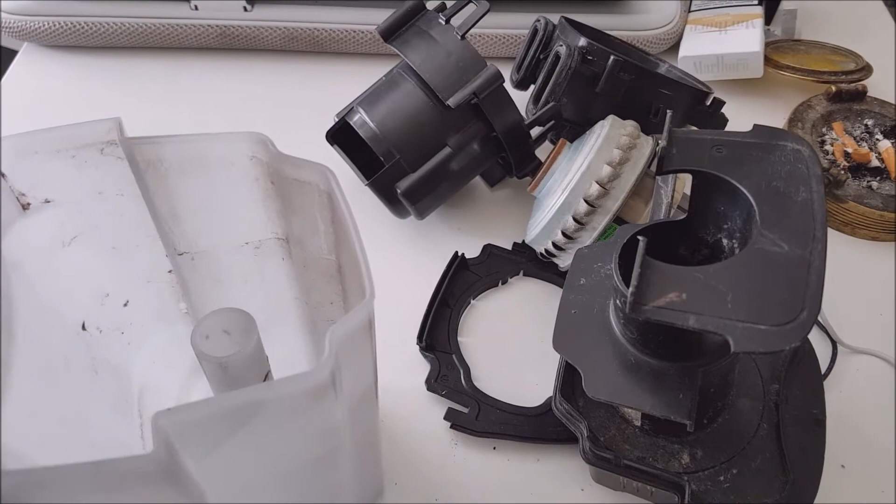Yes, Kärcher cares. And the story that goes on from the point when I published my videos is a rather amazing one. I got several mails from Kärcher, and one of them was not exactly constructive, but the other ones were. So it happens that instead of sending me their lawyers and/or public relations assistants with big chests, they sent me something completely different. A ball game I was not expected to handle.

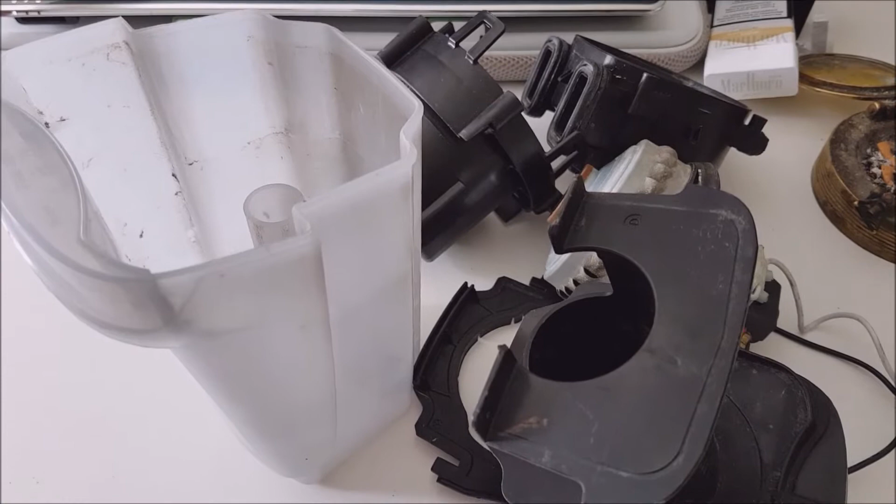Really. They sent me a full-blown competent development engineer. Yes, they did. So, yep, I'll say it once again. Kärcher did send me a full-blown competent development engineer. Now, how cool is that? All of it because my unit got somehow destroyed by premature corrosion.

Wow. Yeah, so with the gentleman we sat down at a coffee table and we discussed several issues. We discussed definitely engineering, and also I displayed the parts I recovered from the old units, and he took them away for further analysis. Now, that's something that they haven't seen yet to that extent, but definitely there's going to be feedback, and production methods would probably be altered to incorporate grease, or I don't know, whatever solution they'll come by, because it's really a big piece of very nice engineering.

So, injecting oil in the crankcase was an easy fix. Yes, but easy fixes apply to products that can stand them. Mostly good products, because you cannot really apply an easy fix to a lemon and expect it to become a good product. It will take much more than that.

So, also in the comment section, I received a very interesting input from a viewer who claims that overloading the accumulated water tank could lead to problems. And I decided to take apart the heart of the machine, actually the blower or the sucker, well, the fan, the turbine. And this is what happens in the process.

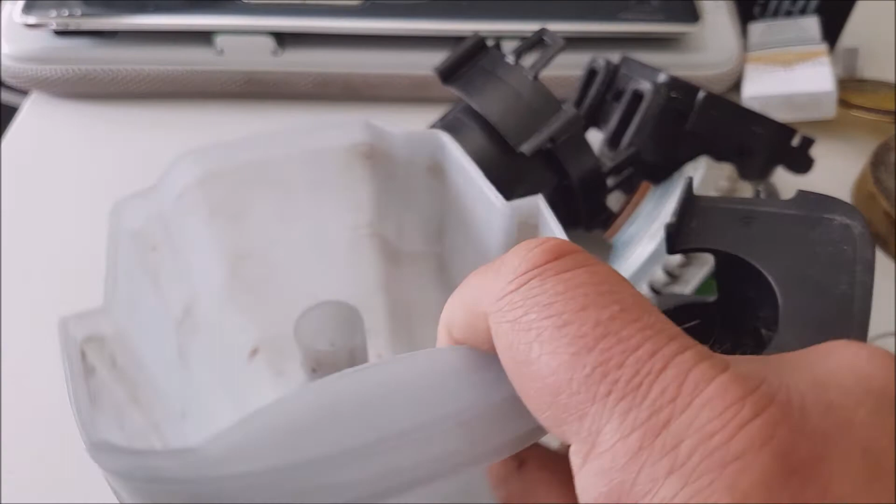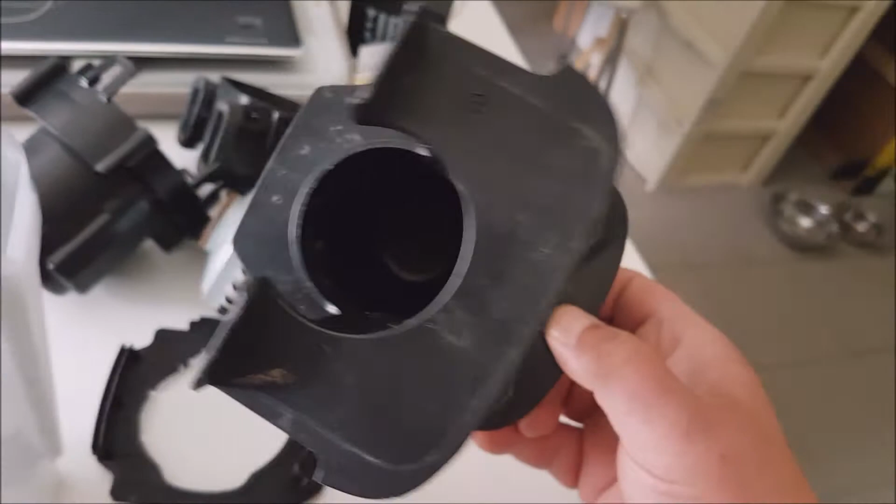So let me explain. Water comes through this hole. Water comes from underneath. Water and air is initially aspirated through this pipe. I will show it better for you. And it comes from here, where normally it would continue to go upwards, but it is covered by this part. So water will go inside, take a round trip in this baffle from the inside, come out, and be directed downwards to the tank. That's a very cool idea. It's a kind of round trip. So most of the velocity of the water will be lost at this point in time, and it will just drip into the tank. But there is more to that.

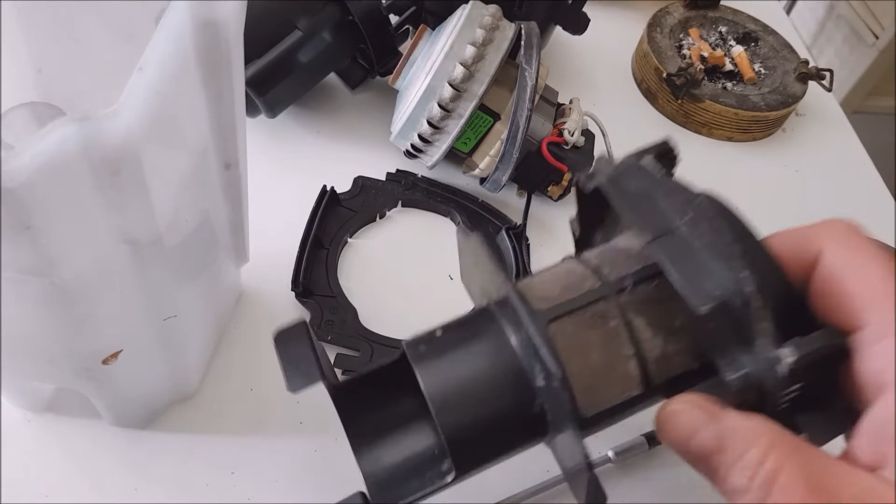So just before we assemble, I'd like to show you an important spot that you may need to clean. Now, these are the old parts. They have been used about 10 months. And you can see that if your device loses suction power, the fix is extremely simple. Just clean this fine mesh here, right? I would use a small toothbrush or something like that, but don't force it.

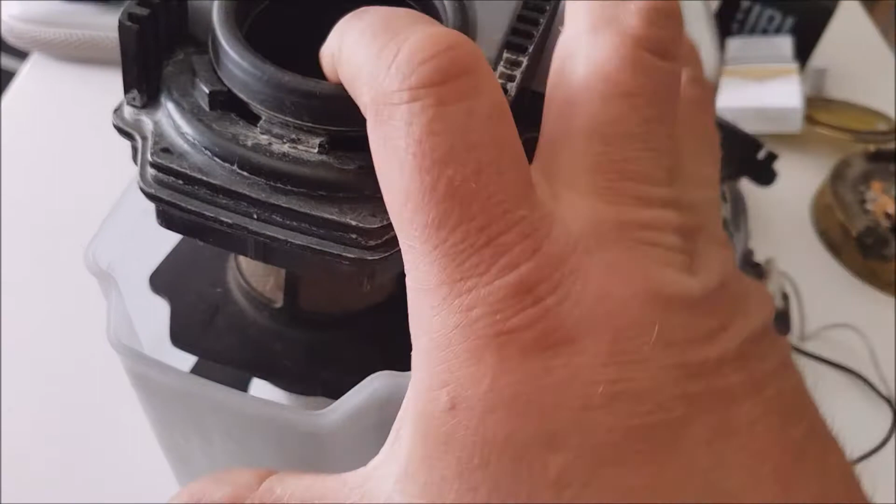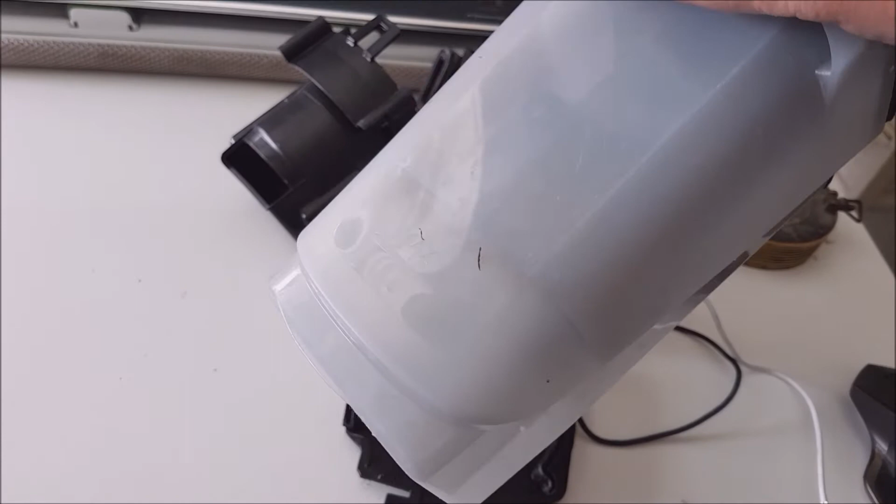It's a very fine mesh, and this mesh is supposed to carry on the final separation between water and air, because water has to be collected in the tank roughly like that. Oops, I got it the wrong way or not? No, I got it right this time. And you can see that it's quite a way. So there is a max. Come on, camera, show it. There is a max mark here, which says that the maximum level of water you can load is about there. But you can see that there is a lot of reserve before it reaches the first baffle.

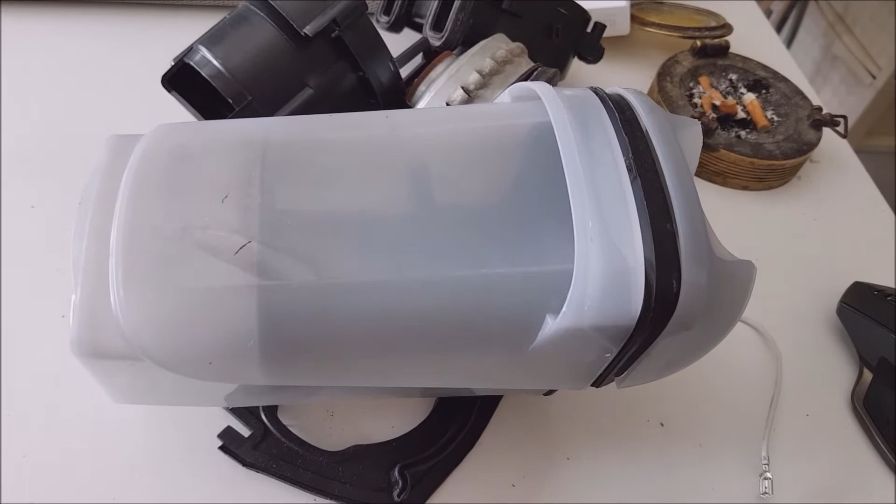And now this volume should be left, and it is, because when you refill the clean water tank, normal procedure is to empty this one, so it can never get overflown. And all this airspace here is made to kill eventually forming foam, and further separate the water from the airflow. Good. Now, at top of it is the hole through which air will be sucked away.

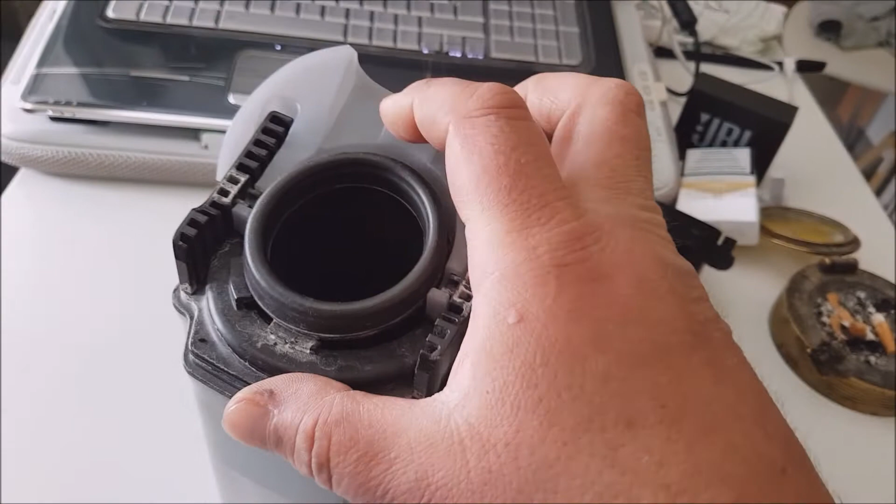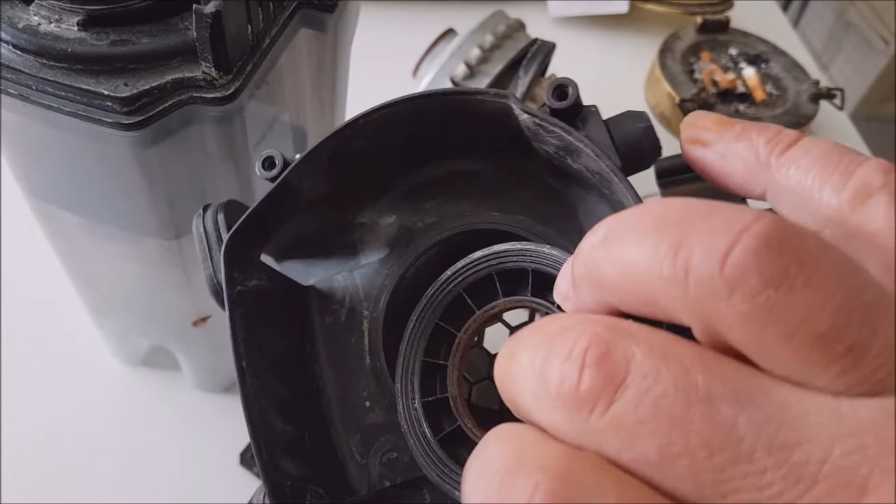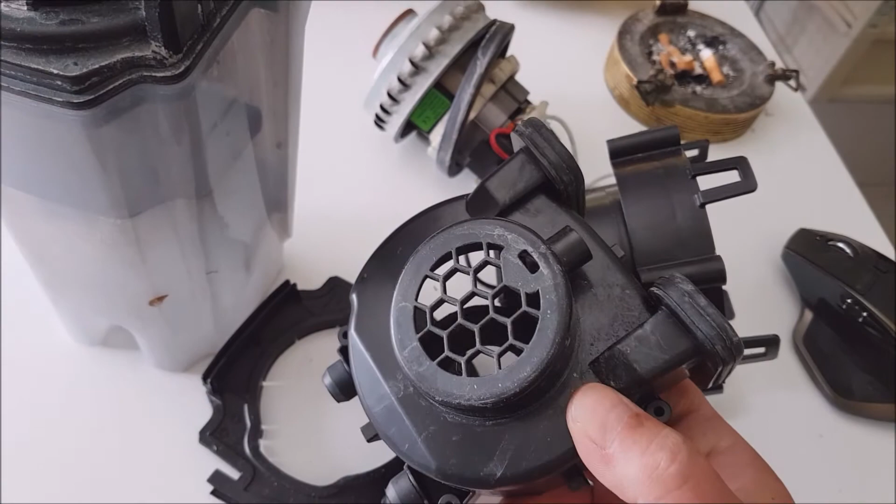This is performed by, just lost it, a very nicely shaped, really. I mean, this is great molding, boys. Yeah, it really is. A lot of engineering went into that plastic part. It's kind of complex, very well molded. This is a high precision thing. I mean, for a consumer device, come on, not everybody can afford to do that, but they did it.

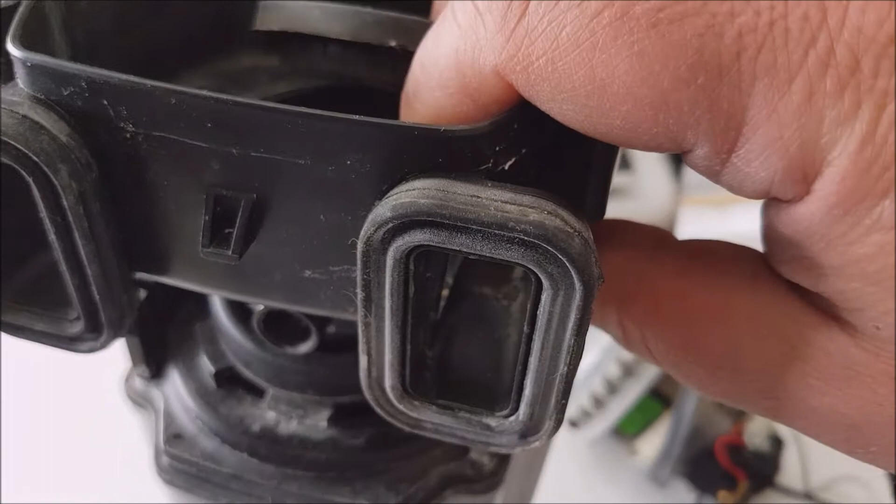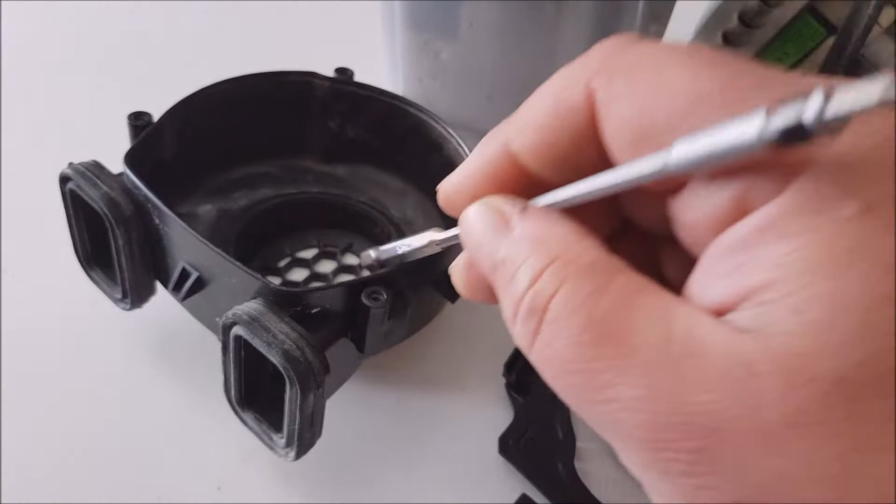So it goes at top of it, roughly this way. Obviously here it will not stand because the body of the device is missing. Goes this way, and from here air is drawn away by the turbine, which is this assembly.

Now, as something interesting to observe, the motor is literally corrosion free. Yes, siree. The motor is quite well isolated from the moist air. Now, whatever you do in this kind of separation between air and water, even more water with some sort of cleaning agent inside, you will never, really never completely separate the two fluids, water from air. It's a complex process, so some humidity will go inside, definitely.

And you can see that there is some superficial corrosion on the impeller element, but this is only like a paint. It's really a very thin layer. It has nothing to do with a stable corrosion, I'll say, a corrosion that will eat things apart. No, it's only very superficial. Yeah, and furthermore, this kind of rust seems to be very stable, so actually it's an oxidizing process that seems to protect from deeper corrosion.

Yeah, it happens with a lot of... Well, there's not only one type of corrosion, you know. There are several of them, and this one is very superficial, so eventually in some very long time it will do some damage, but the unit will be completely outdated. It wouldn't make such a big difference. Here you see it's very superficial. In a lifetime this wouldn't make a big problem, wouldn't make a hole.

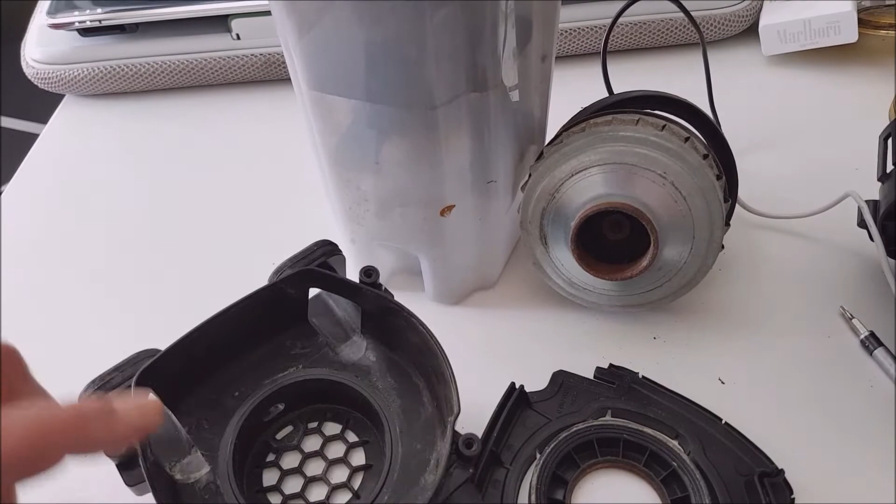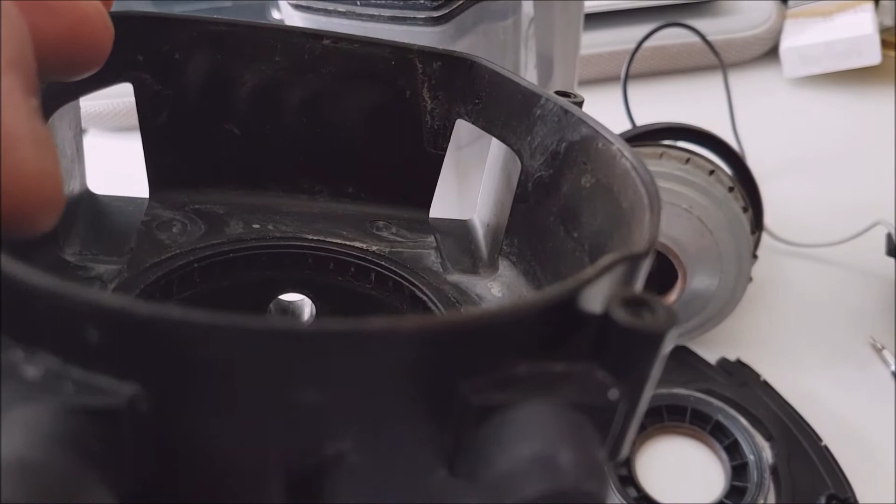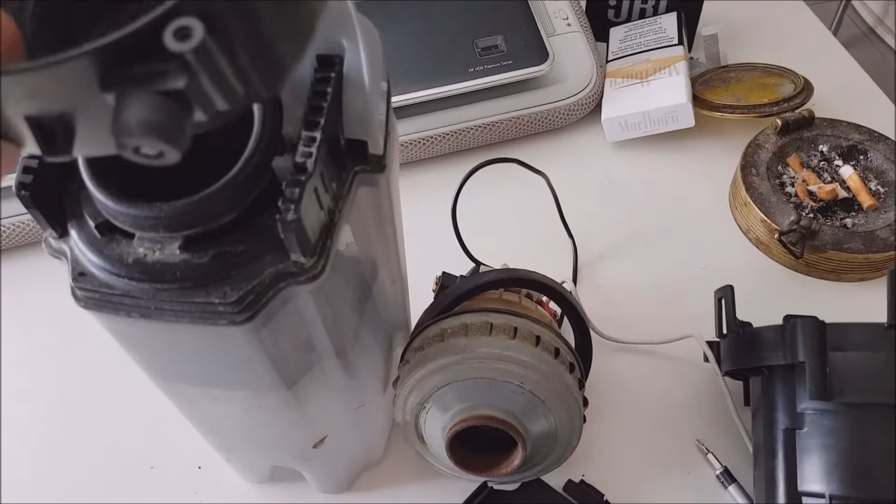On this part, there is a pipe coming from this side. I don't know if you can see on camera. Right. You see the hole, you see the air and light coming through it. And this is a very nice feature, meaning that if for some reason you put everything on top of the other, I'm gonna move it, and you let it fall, which in the normal position will fall this way, even then, if some water is to escape through the serpentine inside, it will not reach the fan.

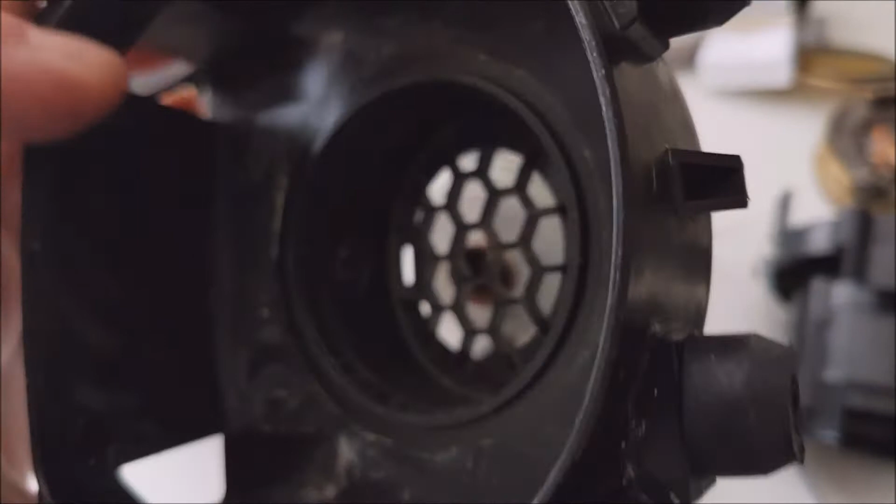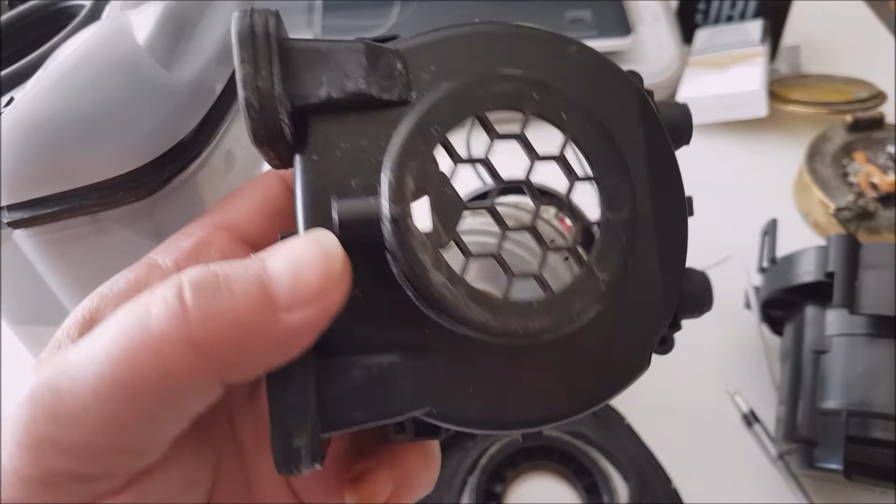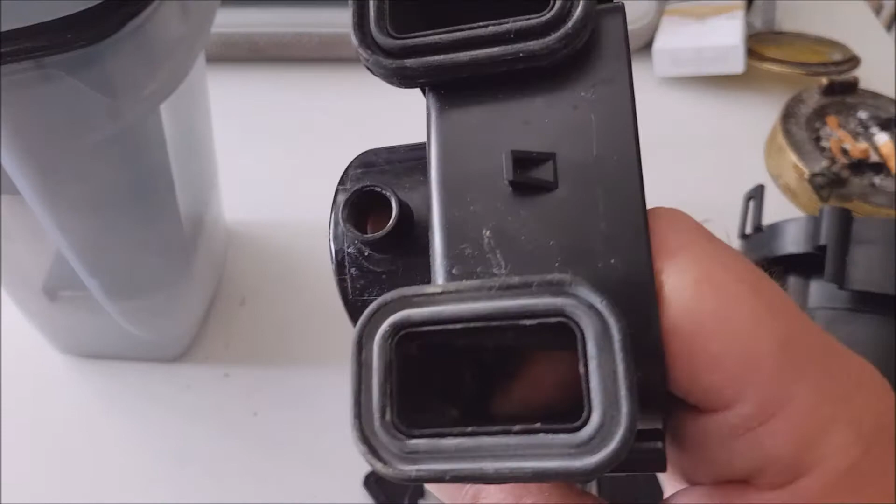It will be drawn by gravity and flow through this pipe, and this pipe in the original equipment goes down to the brush assembly. So therefore, it will drain out by gravity away from the impeller and will not cause permanent damage. So even if you tilt this device too much, or let it drop inadvertently, the tank of dirty collected water will be drained, if it should overflow, through this pipe before it accumulates in the fan assembly, in the air turbine assembly.

Now, the motor is also quite good, I may say. It's like new. No corrosion. A nice shielded, not waterproof, but shielded bearing. A lot of brush life left. I like it. Fine laminated steel. Expensive motors have thinner laminations than crappy ones, because it reduces the electromagnetic losses by eddy currents, while cheaper motors don't really care about that. So this is a nice long running motor.

Looks like some very tough plastic, which is loaded with what looks like fiberglass or glass balls. Well, it's loaded plastic. This is really a nice piece of engineering and I like it. I keep it because one day I'll make a do-it-yourself project for my little daughter, maybe a hovercraft, just to illustrate the principle. So far about the impeller.

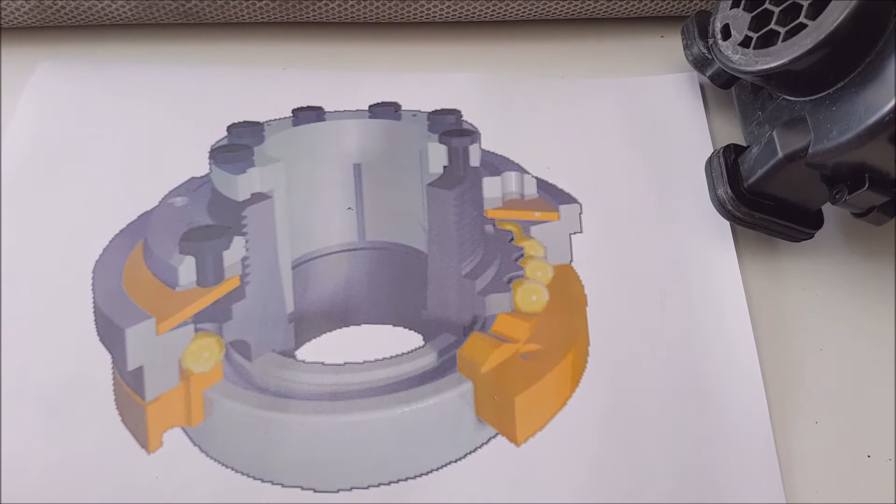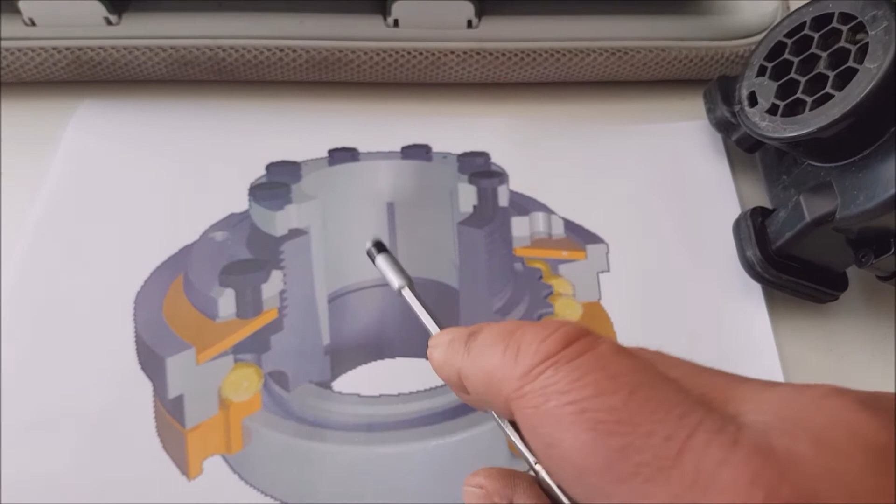Alright, at this point let's take care of the torque limiting clutch problem. A viewer suggested that injecting oil in a torque limiting clutch may impair its function. And this is true for a certain type of clutches, of which the clutch that we have in the FC5 unit is not. In the FC5 unit we will find a ratchet type of clutch, which is not this one, definitely. This is an industrial part that costs orders of magnitude more than the whole vacuum cleaner itself. However, the principle is the same, and I will use it to illustrate how it works.

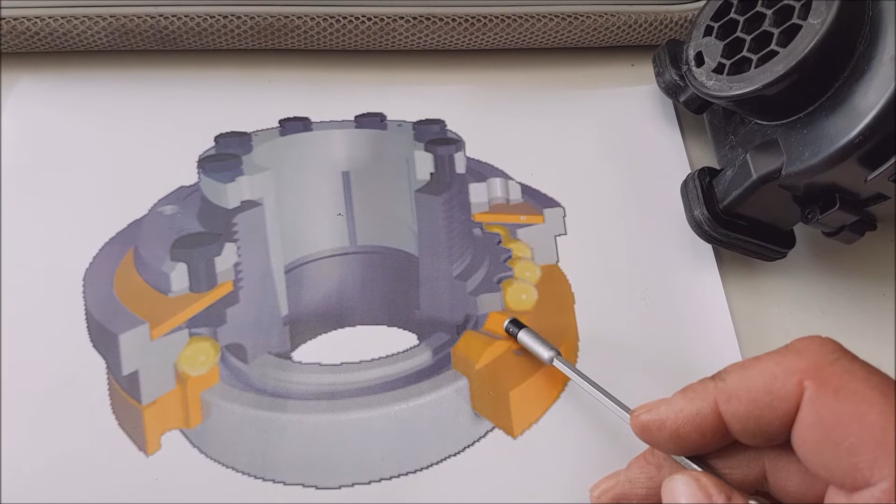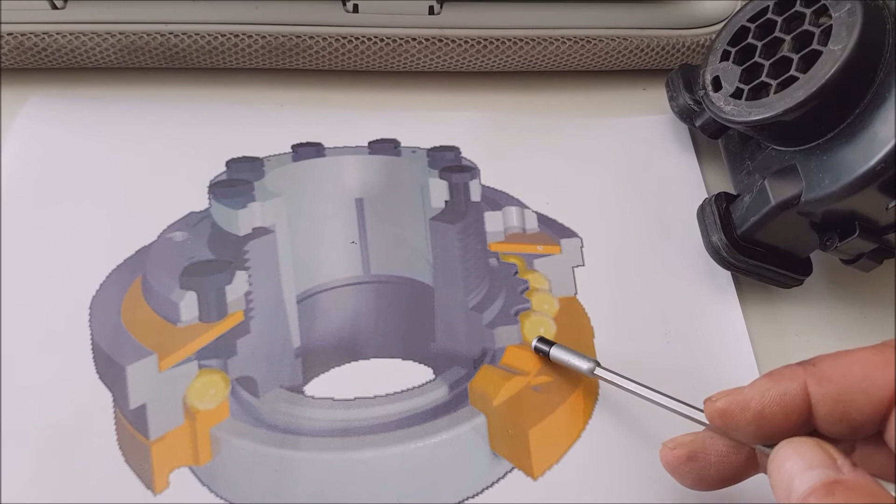So whenever the torque difference between this part and this part reaches a certain value, the balls will be able to overcome this sort of hill, the ratchet itself, and on the way up they will accumulate the energy in the spring that forces them down. On the way down, once the top is reached, they will give back this energy. However, the torque will be limited. It will be limited by the force of the spring it takes to overcome the hill. The friction coefficient has to be kept low in the process. That's why normally ratchet type clutches operate in a rather well oiled environment.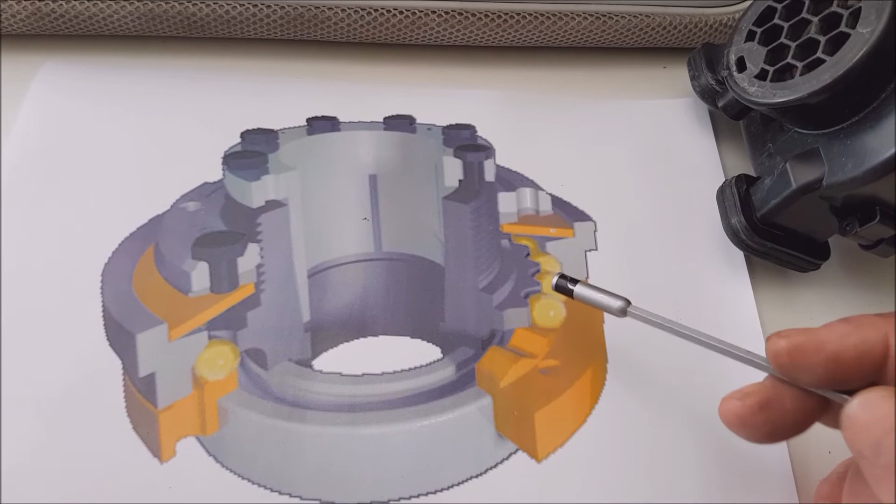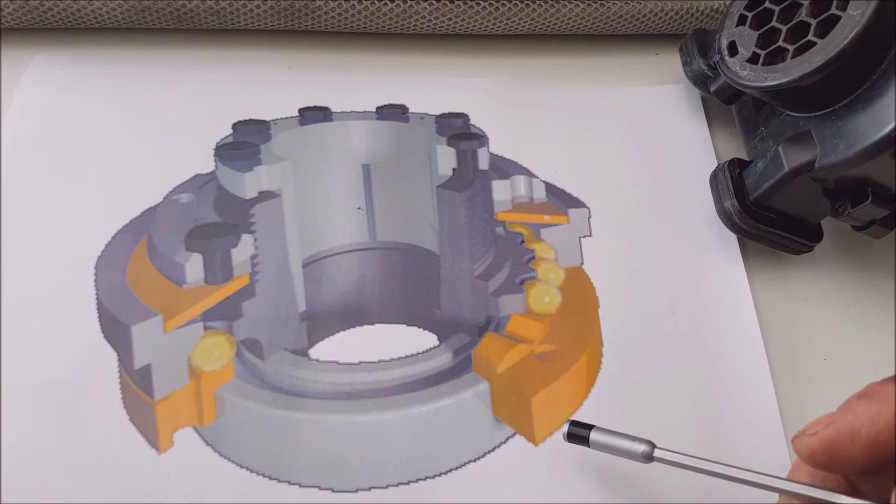Just take apart your cordless drill, if you can put it back in shape, and you're going to find something very similar to this one, and you'll see it's flooded with grease. And the grease is because in the ratchet type clutches, the function of the clutch itself and its rating is not a function of the friction coefficient between the balls or the ratchet and the crown. As simple as that. Friction is an undesirable component in a ratchet torque limiting clutch.

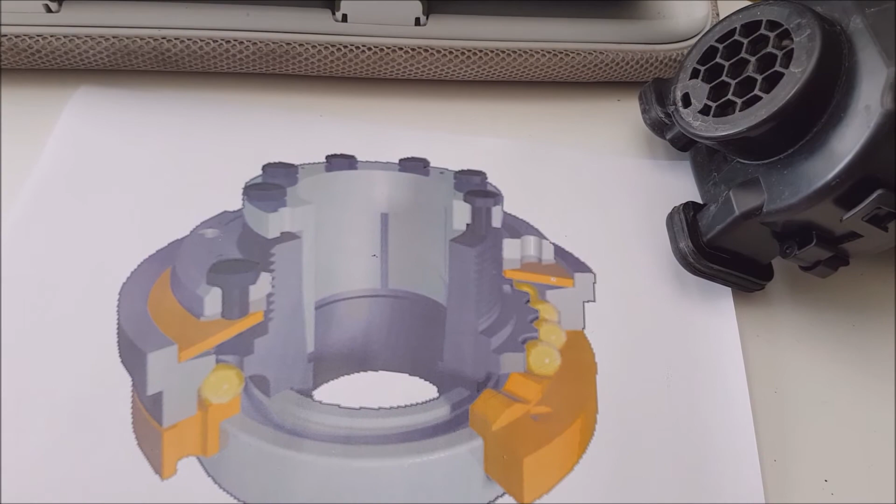Because a ratchet torque limiting clutch is, theoretically, in the ideal case, a zero energy dissipation device, unlike a friction clutch, because if it slides, where it slides, you'll generate heat. That's it. So, in our FC5 unit, where this magnificent blower comes from, blower, turbine, sucker, the way you name it, it's magnificently made. So, in our FC5 we have something which is of this type. I cannot show it anymore because all the parts were corroded to a point where the clutch itself is completely destroyed and non-visible. But this is the type of clutch they have. They have a ratchet clutch.

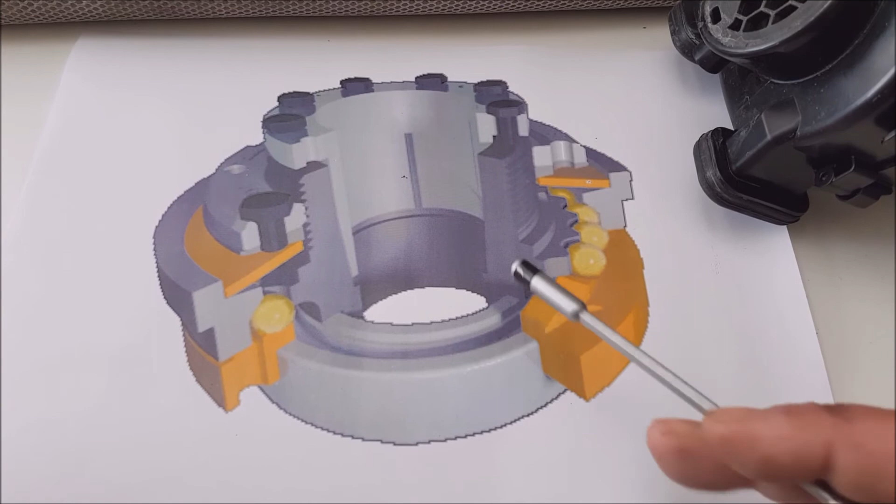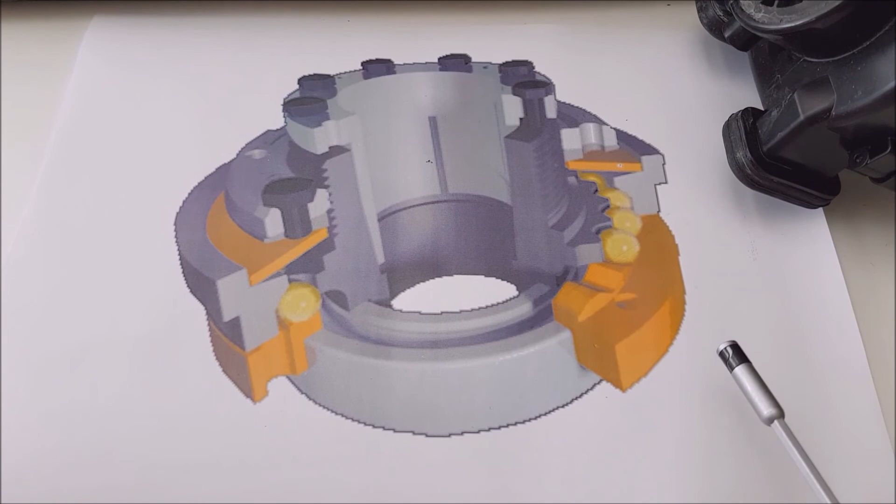So definitely injecting oil into a ratchet clutch does nothing but extend its life. It's very beneficial. So if you say that the presence of grease, oil, lubricant inside a ratchet type of clutch is unwanted, I would say no, it isn't. To the opposite. It's really an environment that does not depend on the friction coefficient between the balls and the ratchet crown. As simple as that. So if you want to inject oil into your FC5 unit, and you bother about the clutch, well, don't. Ratchet type clutches are not affected by lubricant in a negative way. To the opposite, they are affected in a very positive way.

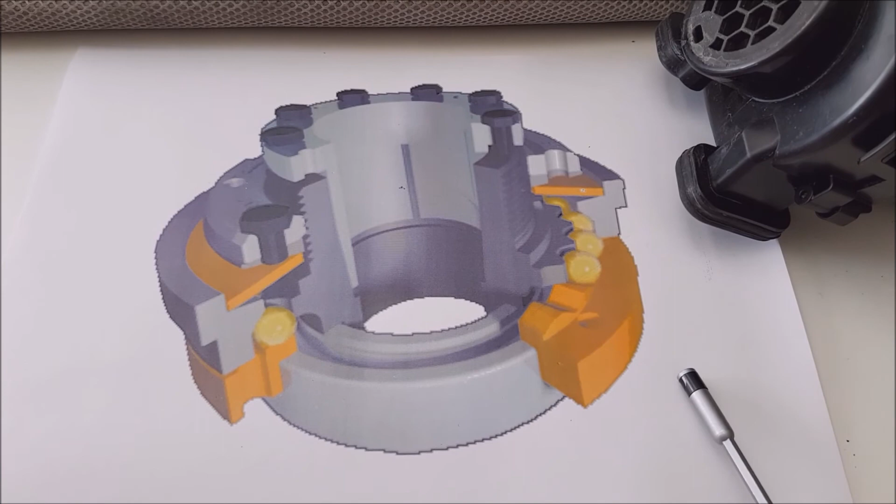Leave comments, and finally, as a conclusion, it's a happy ending story for everybody, because it happens that Kärcher cares, and they sent me unexpectedly a very competent engineer to discuss the problem, and, well, I guess everybody will benefit from my poor, corroded Kärcher in the time I took to make those videos.